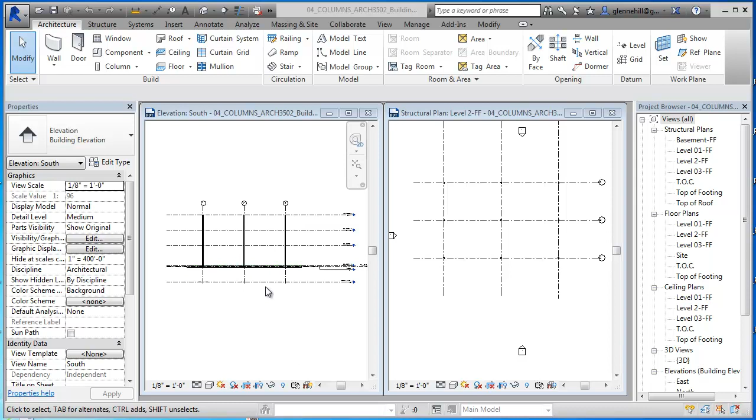In this video, what we're going to do is build the basement structurally down here, underneath the ground, because that's where the basement is. First thing we're going to do is start with the columns. And since this is a basement, most likely it would be built not out of steel but out of concrete.

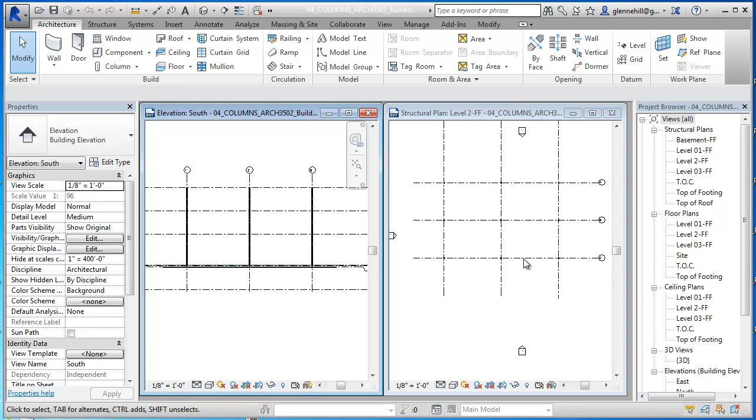So we're going to use a concrete system for the basement. There's a variety of different ways to do it, but this will be a good experience for you to see how to use concrete. So we have our grids right here. The first thing we want to do is find a level at where we want the columns to start and where we want them to end.

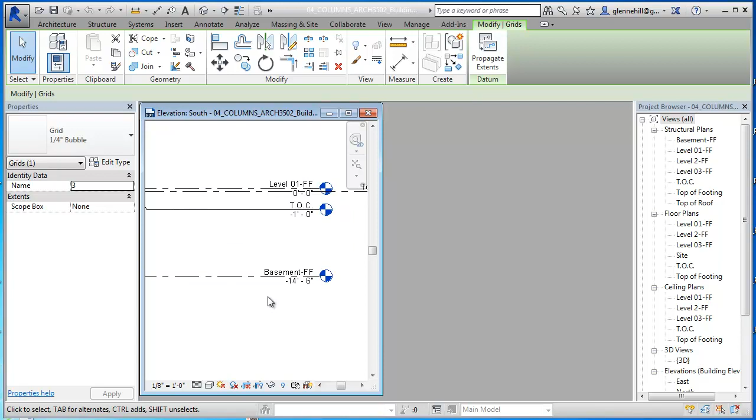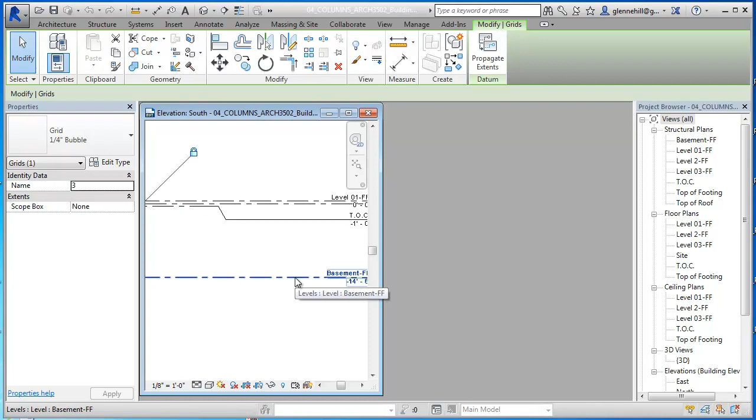I'm going to zoom in right here because we first need to look at the basement finish floor, 14'-6". That means there's going to be a slab on top of that, and then footings and the columns, just like we did up here. So 6 inches below this, or however thick the slab's going to be, is going to be a level where the bottom of the column is and the top of the footing.

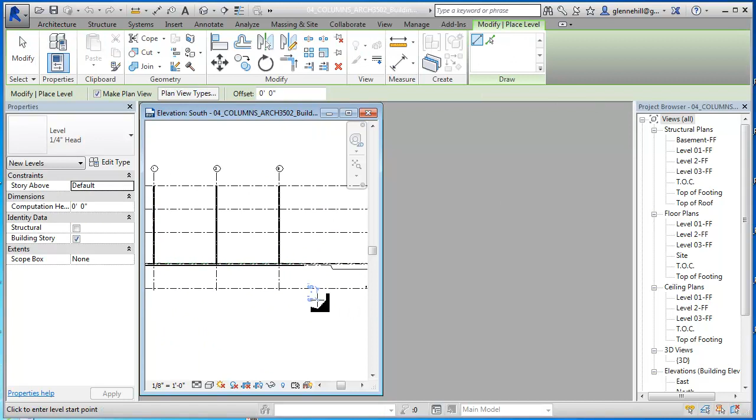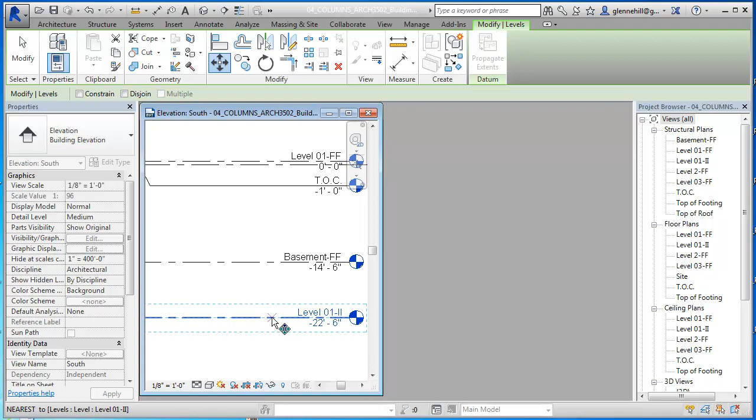So let's just create a grid—go into architecture, a level, I'm sorry, not a grid. I'm just going to throw one in here because we can move it. And that should be 6 inches below that, so I'm just going to move it up here.

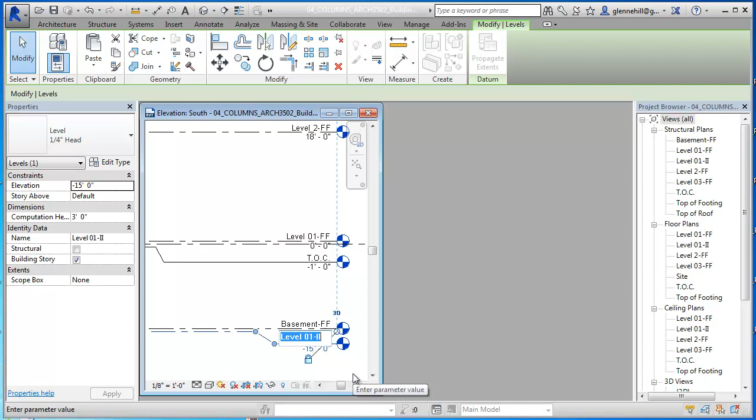And so there's 1 foot, so this should be 15 feet. So I'll minus 15 feet. And so there's 6 inches. This, of course, is the basement's top of footing. So I'm just going to say basement TOF, top of footing. We're going to say yes.

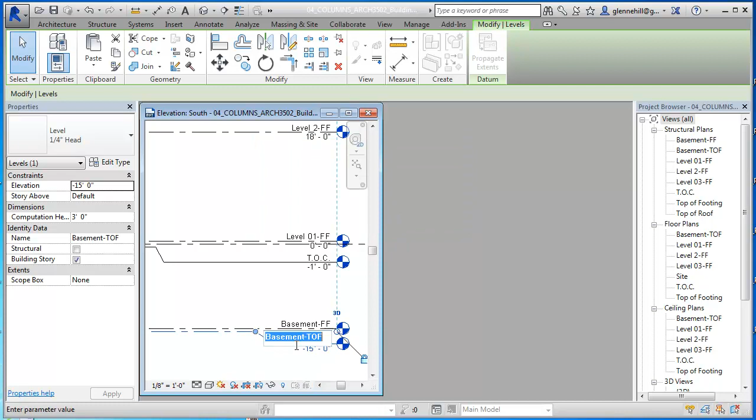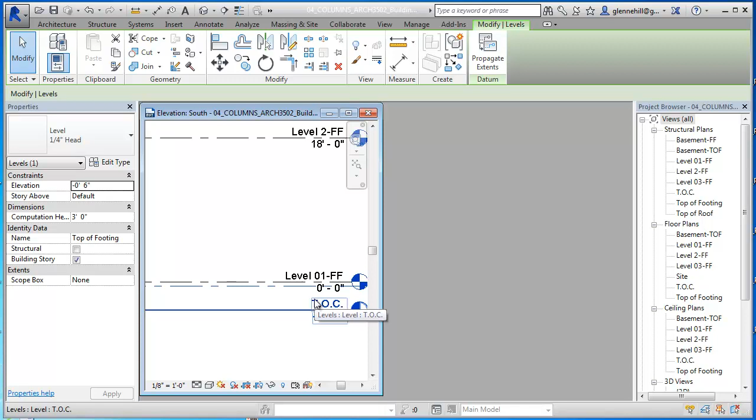So that's where my footing is going to go, or the bottom of my column. And then the top of the column is going to go to the bottom of the slab here. So if the slab is 6 inches here, that's a finished floor, and right there is the top of the footing for the first level. Actually, this is not the top of the footing, this is the bottom of the slab.

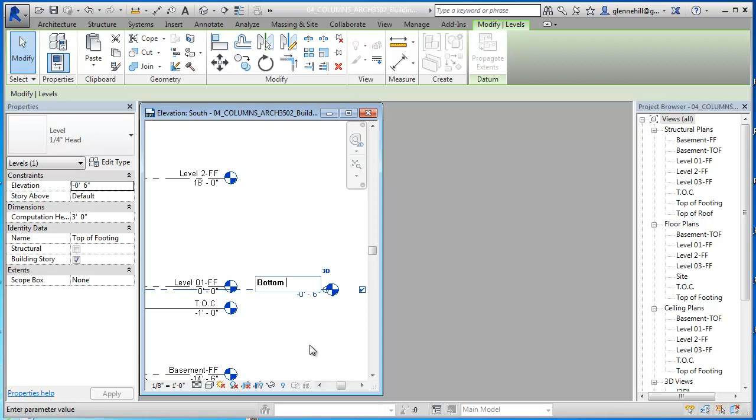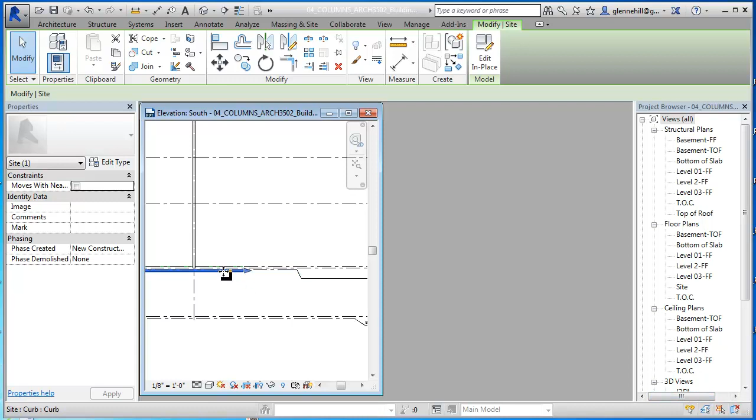And so let's create the column. What I'm going to do—this right here is my site, right? So I'm going to just hide this. We'll unhide it later when we need it, but right now it's just kind of visually in the way. So I'm going to hide this element. All I did was right click, select the element, right click on it, and then use the hide command.

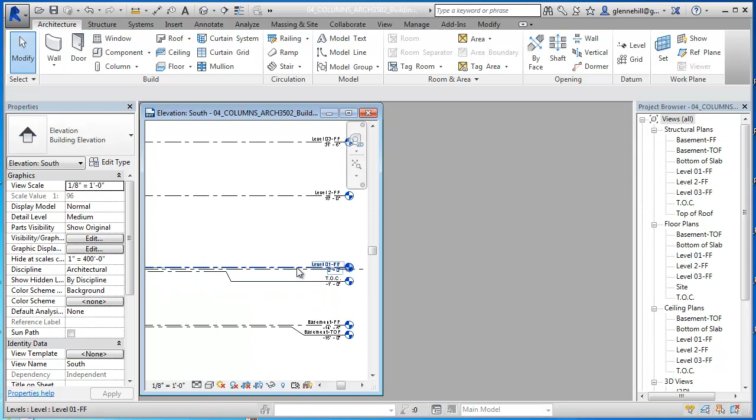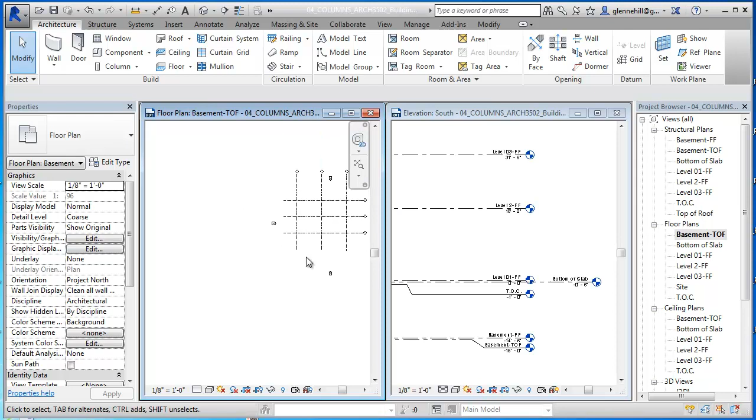And so now we know where our columns need to start, and we know where they need to end—bottom of the slab and the top of the footing. So since I drew that, we're going to find the top of the footing and make that our plan. I'll just WT this so that we've got our basement top of footing.

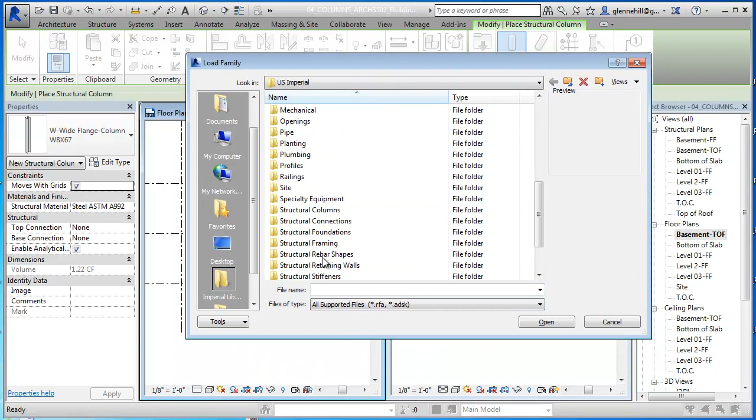And then we're going to go into columns again, and we want to do a vertical column, but we're going to load a family first because we don't have any concrete columns loaded. So we're going to go to vertical columns, load a family, and then go down here to columns, concrete, and you'll see some generic columns. Basically there are two types, round and square, and then two types of round and square.

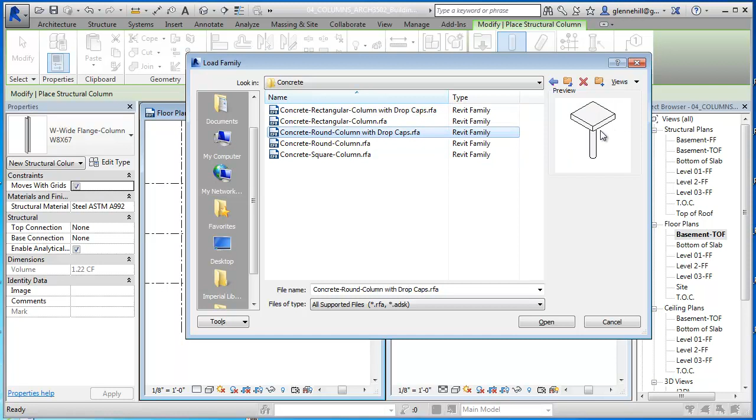One of them is with a cap, and round and a square with a cap, or a rectangle with a cap. So you need to go to Allen and Iano and look at the size that you would need of a column.

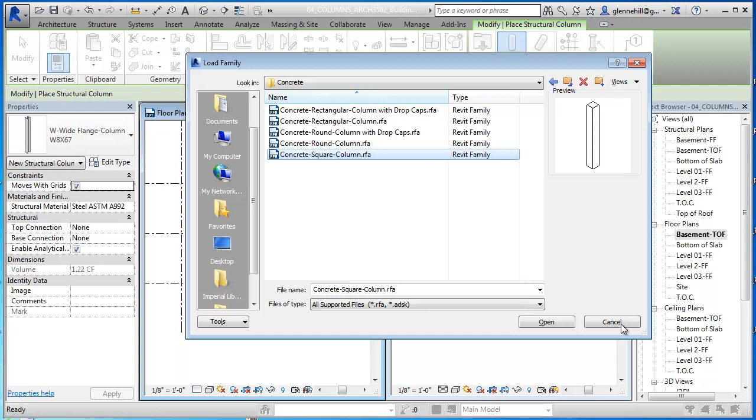I'm just going to make a guess right now of 12 inches, so I'm going to download the square columns. And you'll see if we look in the square, there's already 1, 2, 3, 4 types made: a 12 by 12, an 18 by 18, a 24 by 24, and a 30 by 30.

But if we were going to do a 16-inch column, for instance—if we determined that it would take a 16-inch column—then all we have to do is take one of these, go into edit type, and duplicate this. So I'll make us just a 12 by 12 and an 18 by 18... let's say this is a 16-inch by 16-inch column, 16 by 16.

And then, did I rename that 12 by 12? I think I duplicated it.

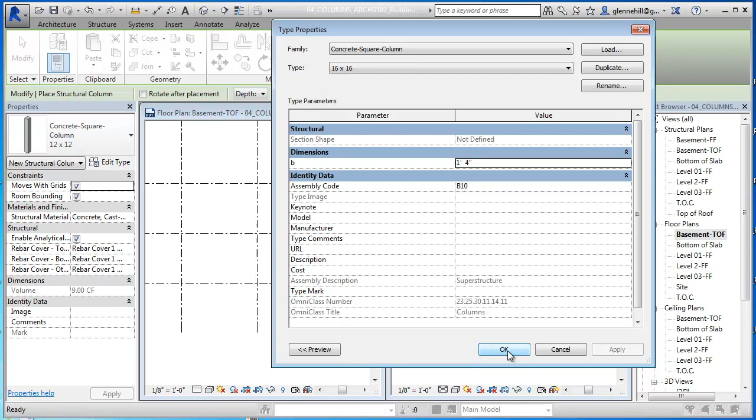Okay, and then I'm going to go in, and you'll see the B dimension is set to 1 foot, and we're going to set that to 16 inches, and now it's 1 foot 4 inches. So we now have a 12 by 12 and a 16. So that's how you would do it.

If you want to do a rectangular column, then you need to download the rectangular column, and so we're just going to use 12-inch columns, and we're going to do the simple at grid points.

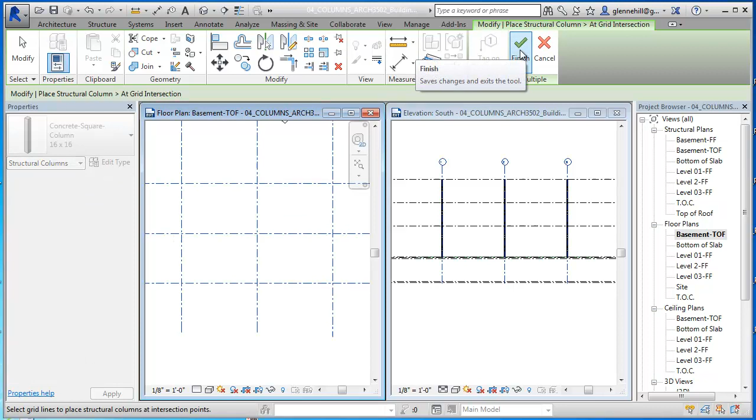At grid points, we're going to select our grid lines, and we're going to say, oh, we didn't select the height. I'm going to escape out of that, and right now we have it set by depth. We want it drawn by height, and we want it drawn to the bottom of the slab on level 1.

So back to grids, select, finish, and you can see our little columns right there. There's our columns, and we've got some on the perimeter.

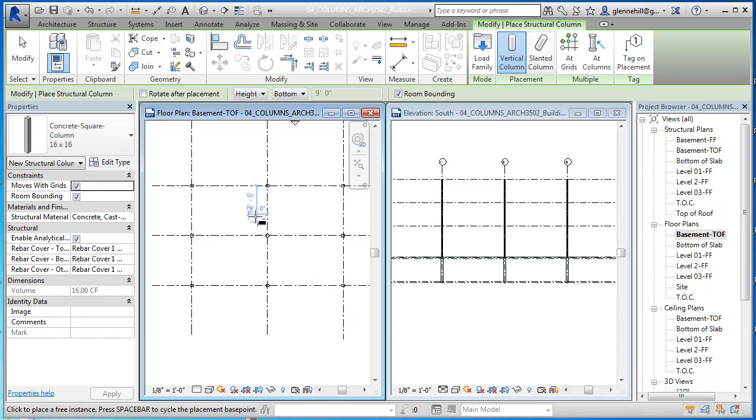And of course, to hold back the earth, since this is a basement, we've got to put a wall in here, and to do that we want the wall to once again go all the way to the footing level. So let's cancel out of this.

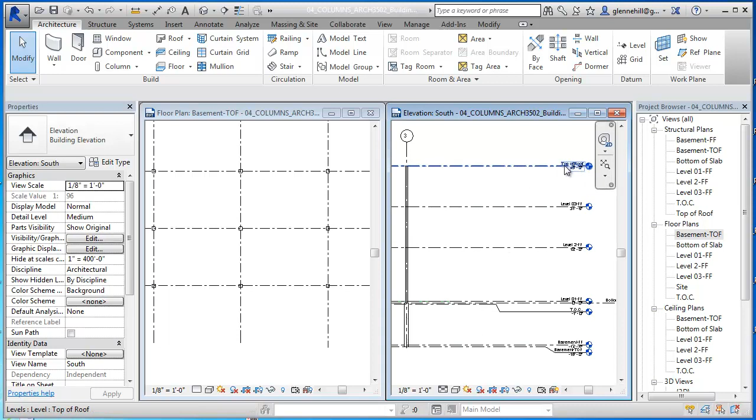And just so this is easier to see, I'm going to drag these a little closer. So if our column goes from here to here, we want our wall to go that same distance. We want it to sit on top of the footing.

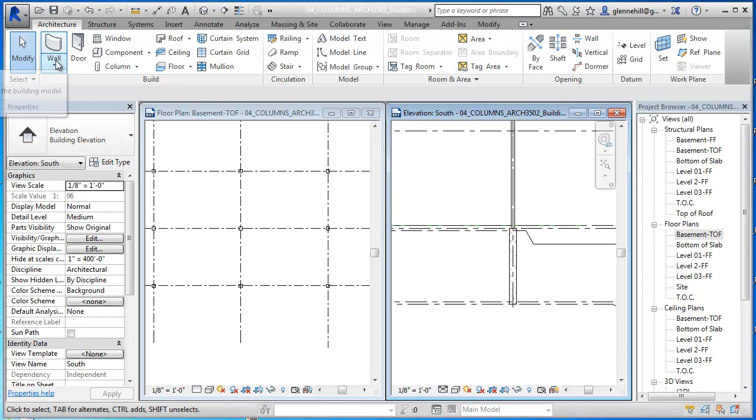And so we're going to go into walls here, and we're going to build a structural wall in this case. And once again we're going to design it by height.

And we're going to go to the top of, the bottom of the slab with the wall instead of giving it a height.

Here you'll see that on walls we can put them in by the center line of the wall, the core center line, and I'll talk more about that when we get into envelopes. But also the finish face and the finish interior.

So what I'm going to do is place that wall on this grid line because I want the wall to be on the outside of that grid line. Half the column is going to be inside the wall, half the column is going to be outside the wall. So I'm going to set this by the finish face of the interior, because I'm going to draw the interior face and then it'll draw the other side.

And then we're going to go over here and pick the type of wall we want. It says a generic masonry wall right here. So I'm going to select that, but I want mine to be 12 inches thick because I think it's going to take at least a 12-inch thick wall to do that. So I'm going to edit the type again and just duplicate it.

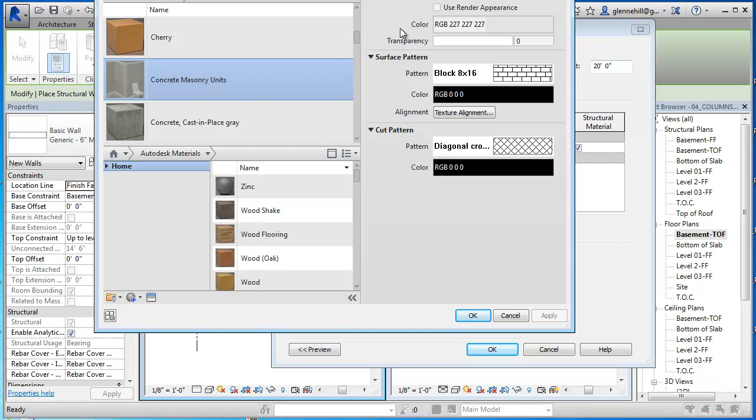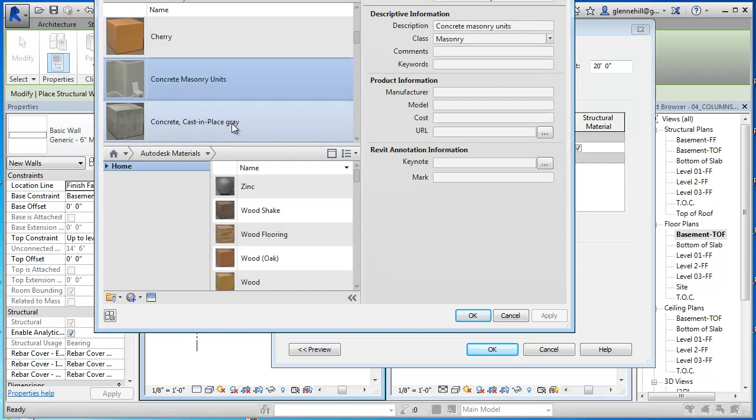You can see it was set up to be a concrete block wall instead of a solid concrete wall. So what I'm going to do is change these settings. This is the material setting, there's the identity, concrete masonry units. So what we're going to do is just change this to concrete cast in place gray.

It happened to show up here, but if it hadn't shown up there, I could type in concrete and you could see that. So I'm going to change this from concrete masonry units to concrete cast in place gray.

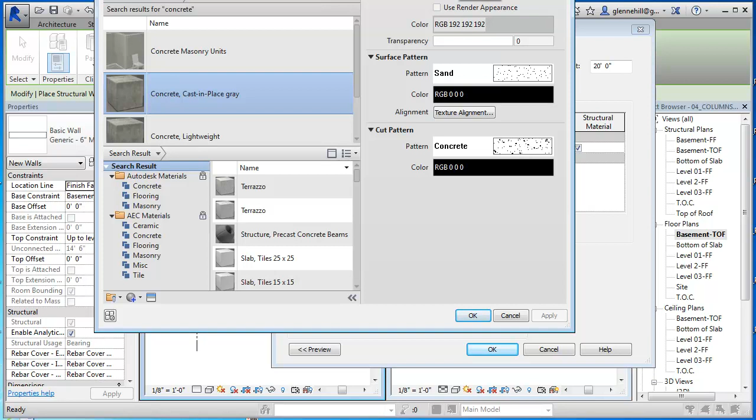And if you look here now, our graphic symbols are different. So the surface pattern will be a stippling, and then the cut pattern, when we cut through it, will be this concrete symbol, a standard ANSI concrete symbol. And then when we render it, it'll render with this, what they call the appearance.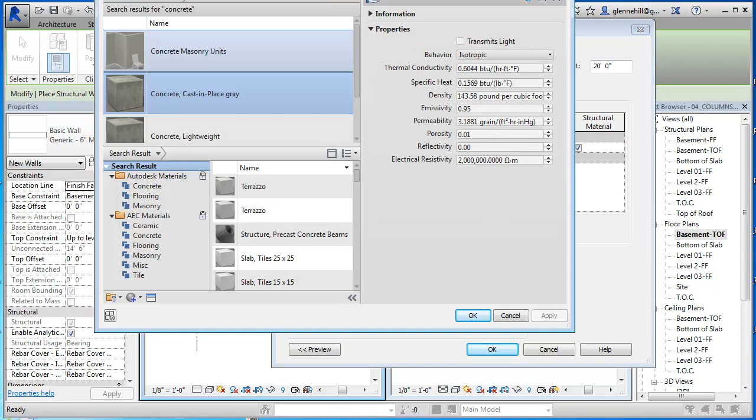And we'll talk more about materials as we go along here. And then, of course, we can put physical conditions, basic thermal information to it, if we wanted to, or they already have that. So I'm going to say OK.

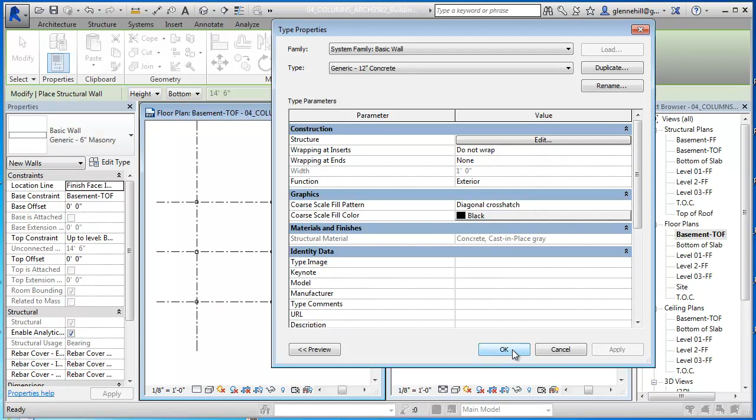So we've changed this to concrete cast in place. So we have a structure element that's 1 foot thick, concrete cast in place. And its width is being defined by the edit of that section. We're going to say duplicate, I think everything else is OK. I'm going to say OK.

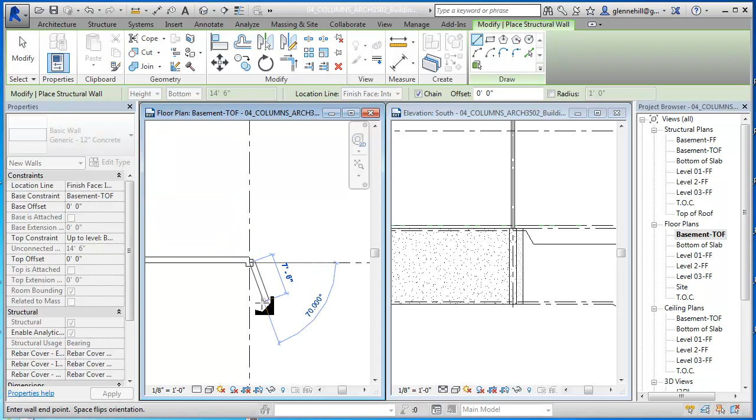And now I'm going to go in and draw walls, and I'll just do it by a series of lines. So I'm going to go in here, snap to the center of that, and you can see it's drawing to one side. And I'll go down to here, snap. Snap.

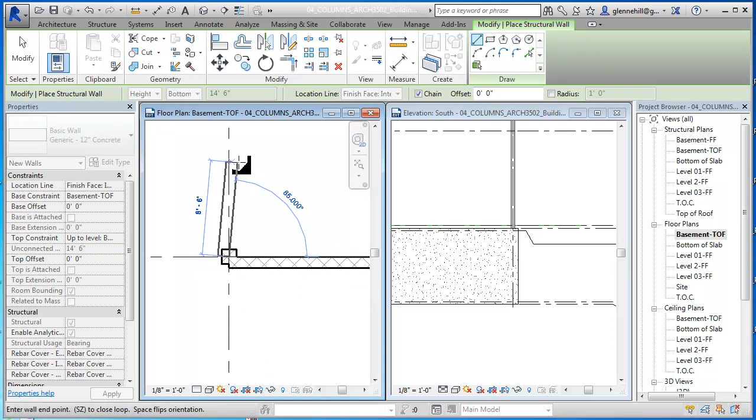And you can see that these objects understand that they need to join with the concrete columns.

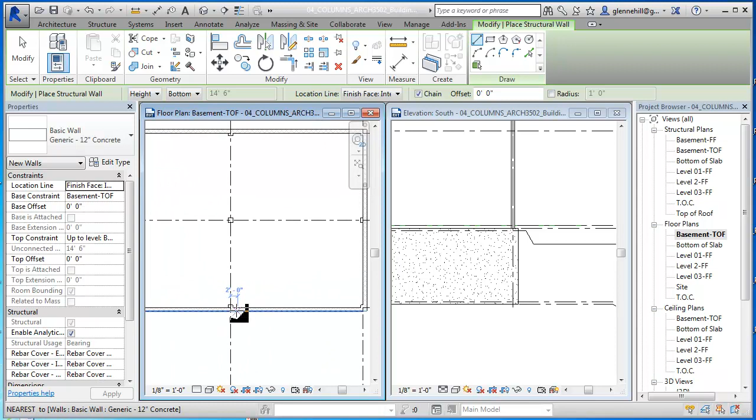Okay, now we could separate them if we want to, but actually this is probably the way in which it would be poured. In other words, the wall would be poured with these little extrusions, as I talked about in lecture, these little pilasters there. And of course that's where the column's going to sit, right in the center of that right there. Okay, the steel columns up above here. So we can see the steel columns there.

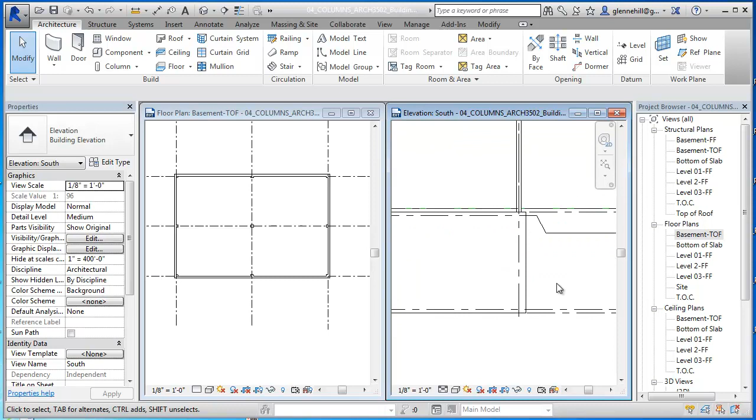If we go over here to our elevation, we'll see we drew the walls, and we have our steel sitting on our columns there. Now, what would probably be better or easier to look at is if we had a section in this.

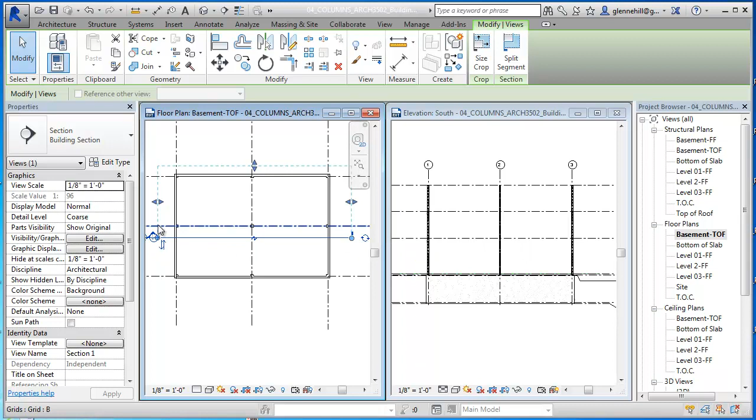So what we're going to do is come in and add a section. So we're going to go to View, we're going to go to Sections. I'm going to click on this, and I'm going to draw me a section from here to here. Okay, and this little box right here tells you what's cut by section. So everything inside this box right here is going to be included in the section. Everything else is going to be removed.

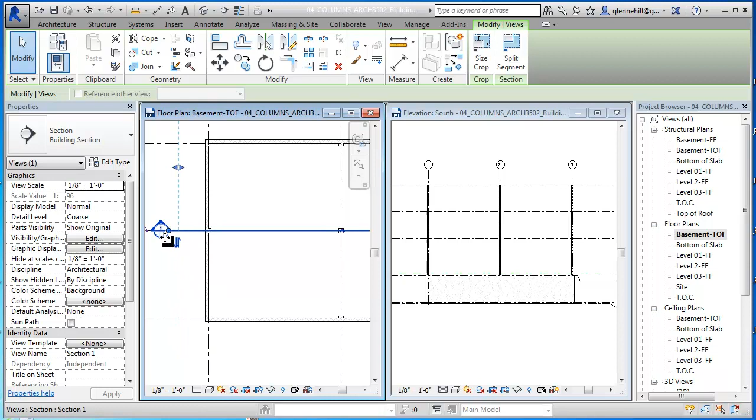If I want to cut through that column right there, of course the section line needs to be right through the middle of the column. So I'm going to set it so it cuts right through the column. And then to see that view, all we need to do is just double click on the little section symbol here. So move in here. Whoops, I flipped it, don't want to flip it. Well, if I can get it. Come on, there we go.

Okay, so I'm going to close this elevation now and use this section, but I'm going to make it so the section is taller. Now notice we can't see our steel, and once again that's because this is set to coarse. I'm going to set it to medium, so that both sides of our columns will appear.

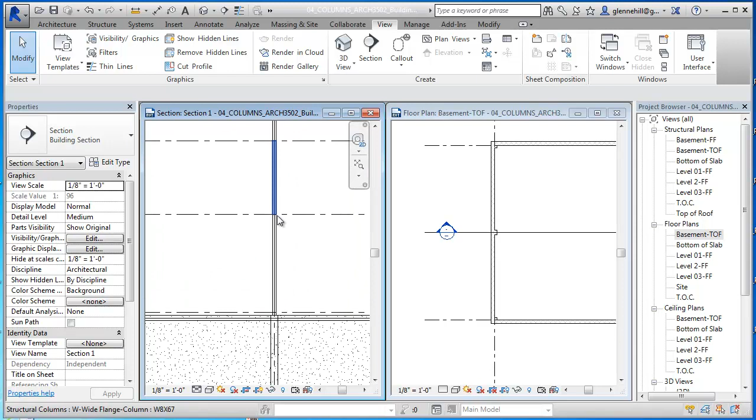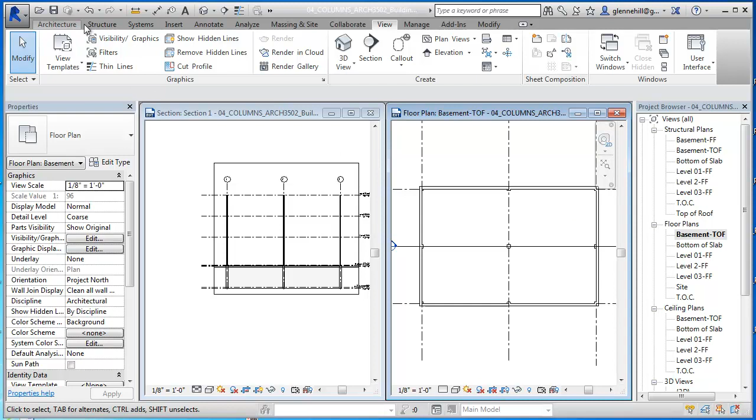So now we've got the basement walls and the columns, and what we're going to now go in and do is place a slab inside the space. So we're going to go over to our slab here, and I'm just going to go into Structure, Floor Types, and you'll see a structural floor.

So what I'm going to do is just take one of these generics, select it, and say Edit Type, and I'm going to duplicate it. And then I'm going to say concrete. I'm just going to call it a concrete slab, and we're going to make it a 6-inch concrete slab.

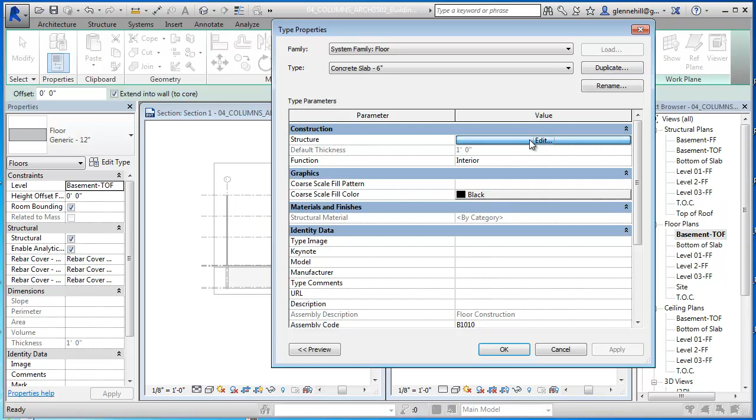And then I'm going to edit its structure. So now it's not a foot, it's going to be 6 inches. And once again, I'm going to go select concrete. So my concrete comes up here, place it. So I'm going to select that as concrete. And we're going to say, okay, okay.

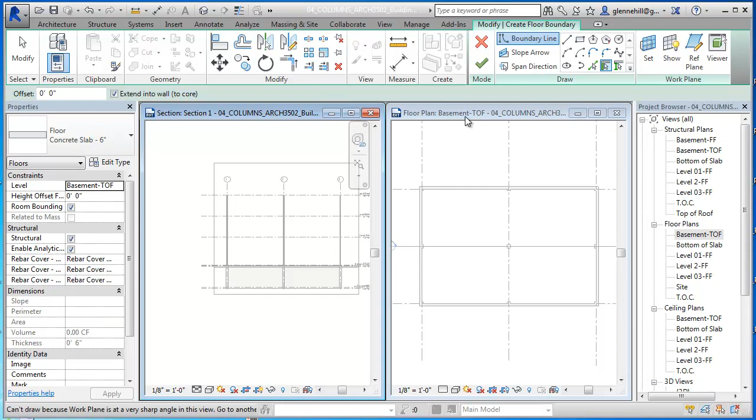Now, when you're drawing a slab, it assumes that you're going to draw it by depth. So wherever your finished floor is, it's going to draw it from that finished floor down into the model in the direction. So I'm going to close this top of footing and open the level 1, because that's where I want this to go to. And I'm going to WT it here. Okay. And so now we have that concrete slab and we're ready to draw.

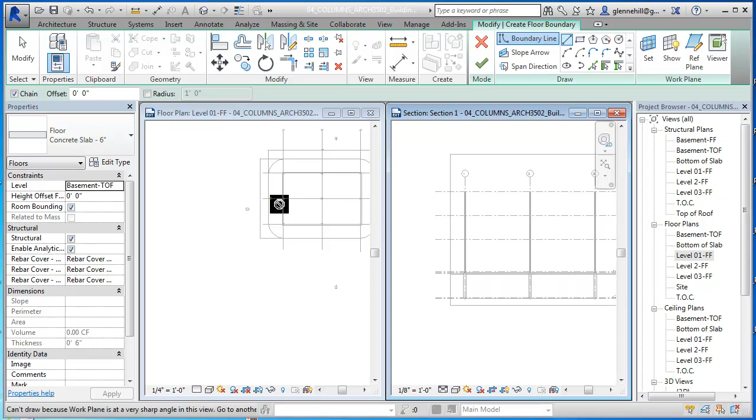So we're going to come in here. Oops. Oh, section. Yeah, we want to draw in this view right here. And we're going to draw a rectangle. And then we're just going to zoom in. We want it to go from, oh, I'm sorry. I'm drawing a slab up here for the first floor. I want to draw this at the bottom. Okay, so we want to go to the basement top of floor. Yeah, we want to draw that there. Sorry, I got mixed up there.

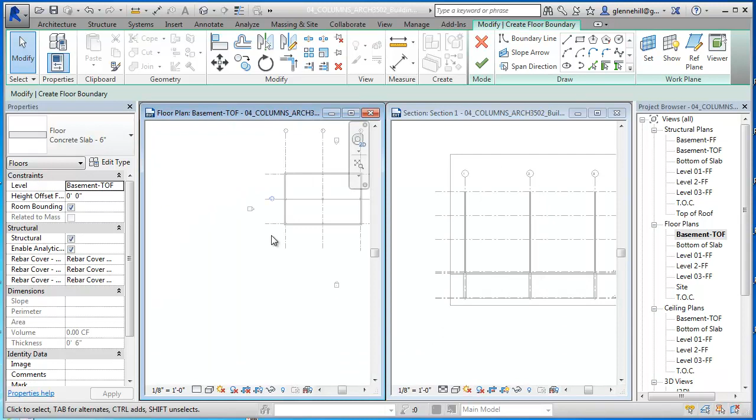So we're going to go in and just draw a slab from that corner right there. And of course it's going to go through those columns, and we won't worry about that at this point. We can fix that later. But what we can see right here is that once I drew those lines in, we get these little locks.

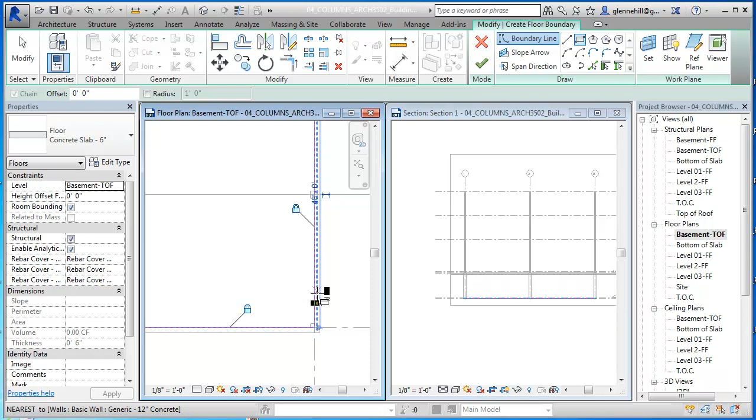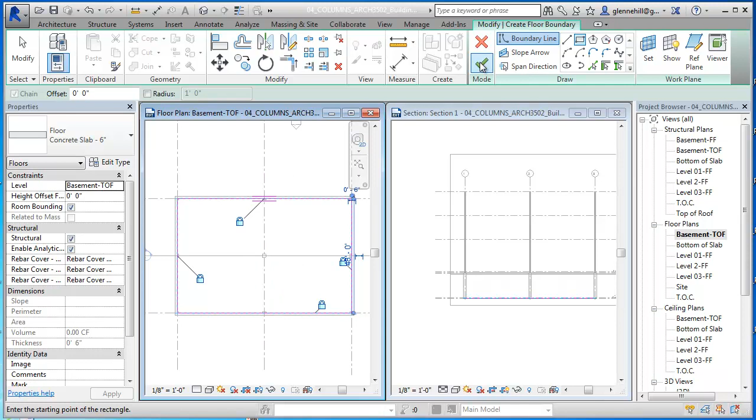And if I click on these locks, what it does is that Revit found another object in the same location as the line that I drew, which was the walls, right? And so it says, do you want to lock the slab to that wall? And I'm telling it, yes, I do want to lock it to the wall, because that way if I move these walls any, my slab is automatically resized and moves with the wall. So that ties everything together. And so that should be fine. I'm going to say check, okay.

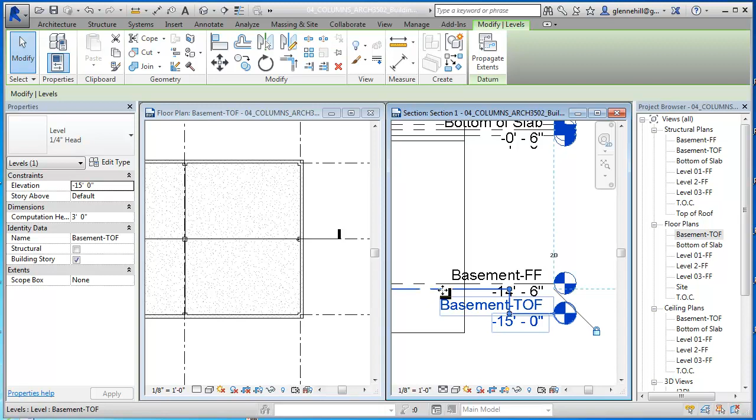And we can see that now, okay, I have this wall, the floor, and the floor is in the wrong place. Okay, it should have been, let's zoom this real quick. Basement finished floor. I'm sorry, I went top of footing. That wasn't top of floor, that was top of footing. But that's easy to fix. Maybe it's even good that it happened so that I could show you how to fix it.

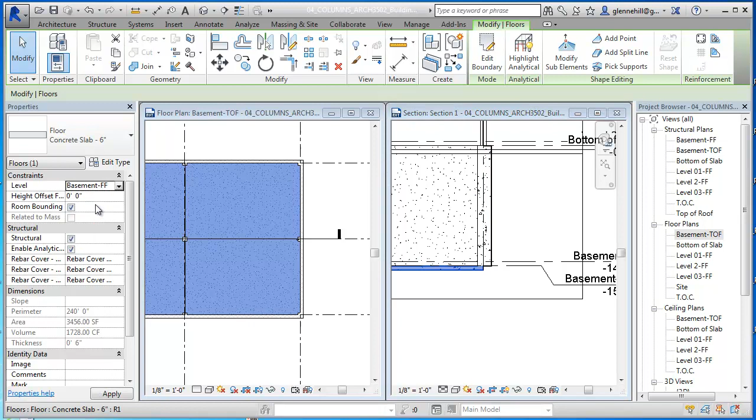Okay, so it's in the wrong location, so I'm going to select it, and you'll see right over here the level that it was drawn at. And if I want to offset it some, I can. I don't want to offset it from that top of, but what I'm going to do is change its location to basement finish floor, right, and apply it. And now it's where I wanted it to be. Okay, it's going to the wall. Of course, this is a section, so we're seeing where it cut through. And so now we have our floor in.

In the next video, I'm going to show you how to put footings, pilings, and grade beams in on this.